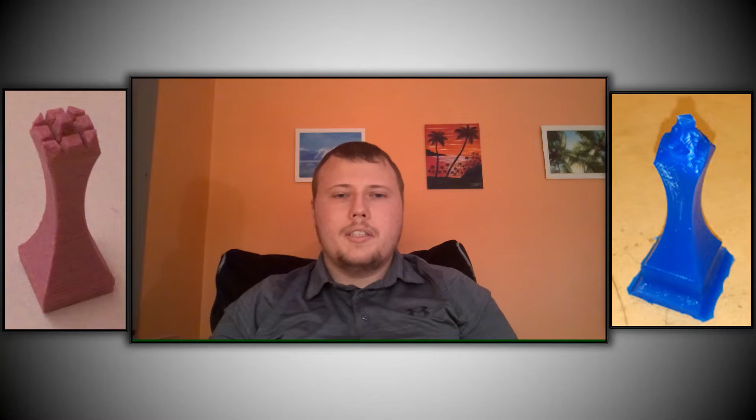Hey, last summer I had made a video about 3D printing a chess piece. Recently, last semester, I made another chess piece, but this time it was made through subtractive manufacturing. So, what does that mean? Subtractive manufacturing is more often than not, I believe, done through a CNC mill.

So a CNC mill is where you have a block of metal or plastic or wax or whatever. Then you have a computer numerically controlled CNC mill, so it can switch bits and drill holes and route out shapes and stuff. So you program it to sculpt a shape out of a block, kind of like an artist would make a sculpture out of marble or something, but a computer switches bits and does it all for you.

There's a special computer software that helps you do this and programs the machine for you in order to do this. So I did that this semester.

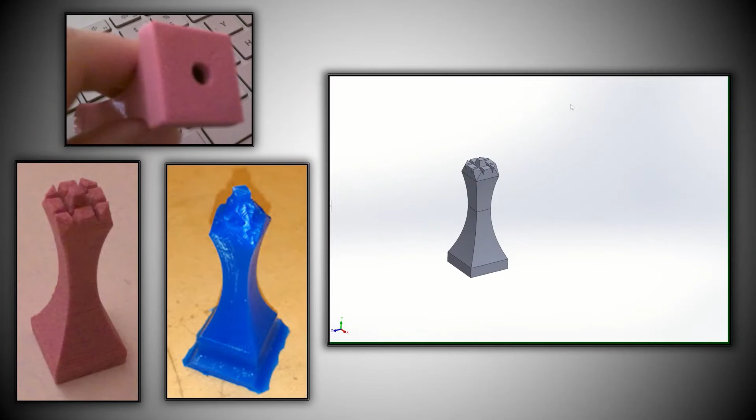Okay, so do you remember how I said that the queen was hollow? Because I 3D printed it, I had to make the walls 1/8 inch thick or smaller, but the width of the base is a lot wider than 1/8 of an inch, so I had to make the part hollow. So let me show you what the inside looks like.

Isn't that cool? So that's what the inside looks like. Here's the hole at the bottom, and because it's 3D printed, this is almost exactly what it looks like inside. Isn't that cool?

So in making the king that you'll see in blue, and note that because of the glare, you cannot see all of the details. It actually did come out a lot better than it looks. But in order to manufacture it, what we had to do was change the geometry. So what we wanted to do is take this queen here and reuse some of the geometry, but make it manufacturable from a CNC milling standpoint.

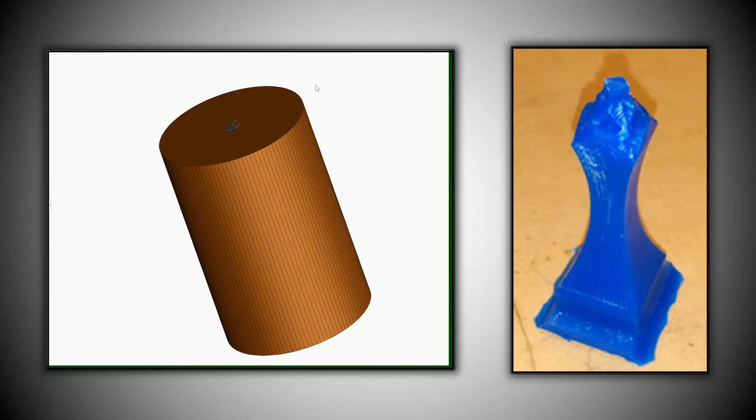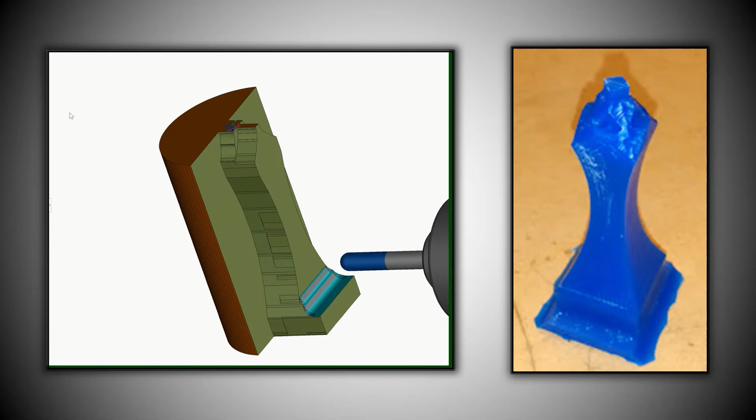So if you were wondering how the CNC mill sculpted the chess piece out of a cylinder block, I will show you. So here's a sped up version of how it was done. Trine actually has a CNC mill, and this is what we watched happen right in front of our eyes with our own G code, it's called. We created the G code in a program called Solidworks.

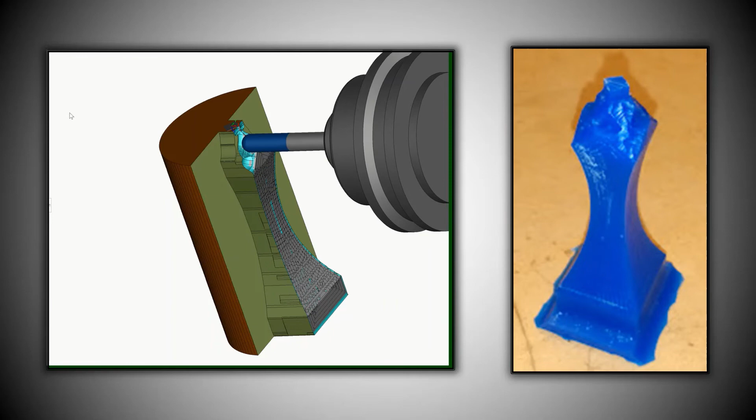In Solidworks, you can not only make the solid model, which I showed you in the last segment of this video, where I was showing you the queen and the king together. You can create those solid models, but another function of that software is Solidworks CAM, which creates G code, which is basically what you're seeing now.

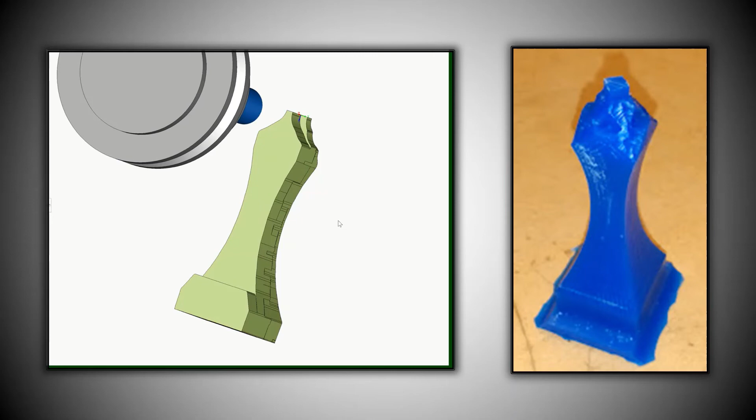And then you can put this G code into the CNC mill. The CNC mill will follow all the codes. That's why it's called computer numerically controlled. That's what G code is. And it'll follow all the steps and dimensions and numbers and stuff, and it'll create your part, as long as it's manufacturable, of course.

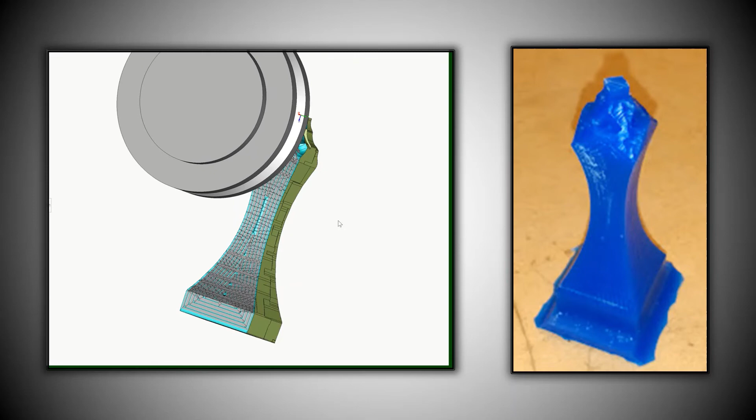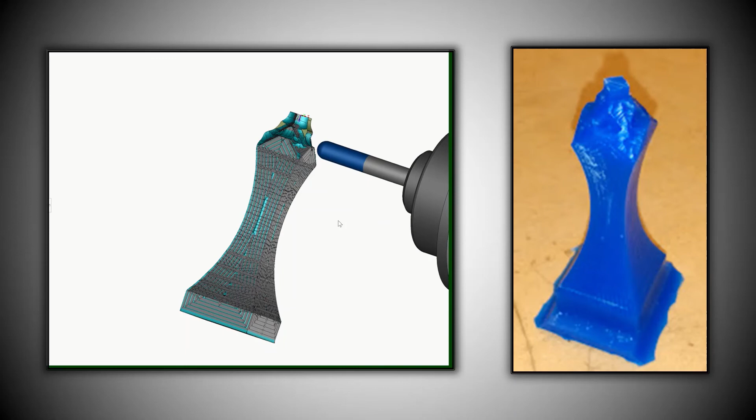But yeah, this was our final exam. It was about 25, 30 minutes long, and we watched the mill create our part. It was interesting because this is kind of different from what happens in the lab, because in the lab it's not only slower, but you'll hear all sorts of weird noises.

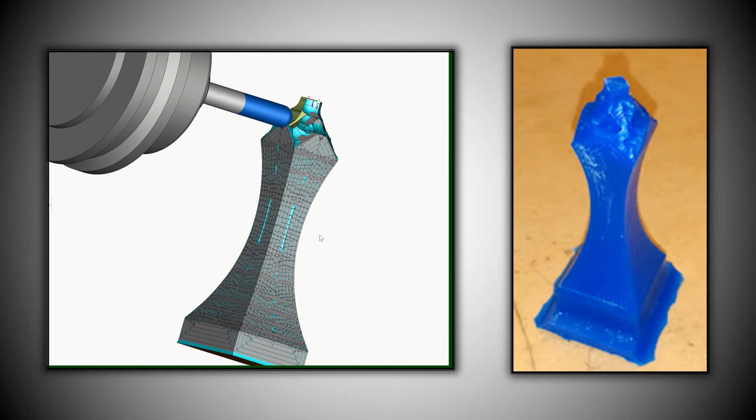It's called chatter, where there's this buzzing noise because your plastic or wax or metal part is vibrating from being routed on, drilled on. And so it's kind of loud, actually. It's very interesting, though, to just press a button and the machine does all the cutting for you. And now here it's finishing up the head really quickly. And so there you go. That's what it looks like.

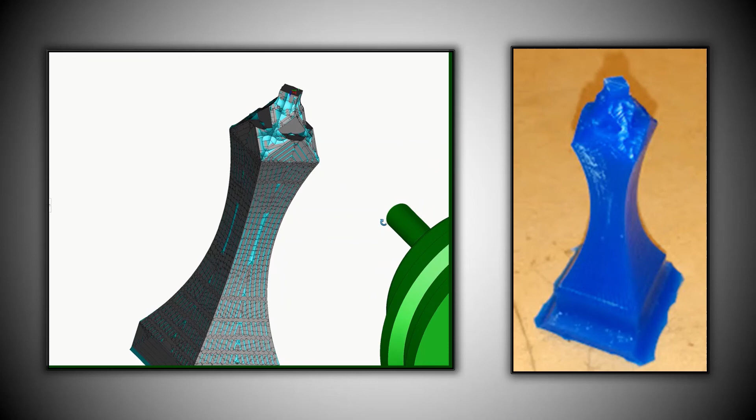Now, of course it's not perfect, but this is precisely what the actual part looked like that you saw in the glaring picture. The picture showed some glare around right here, and that was actually semi-accurate. But when you hold it in your hand, it's actually a lot smoother; this software exaggerates the excess material, emphasizing it because it's like, hey, I want to help you be perfect.

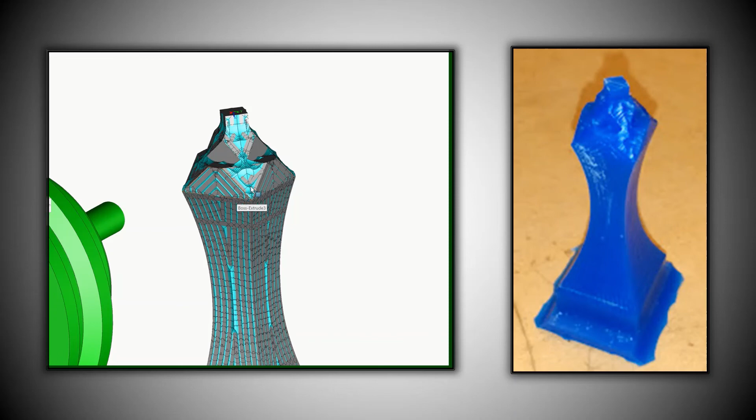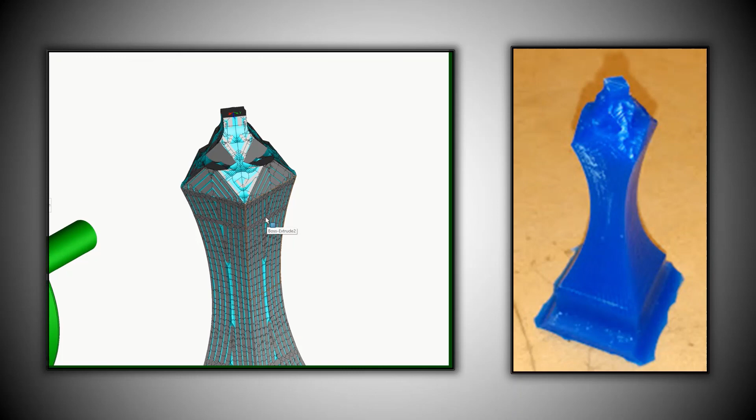Well, who knows if you actually can be, at least not without lots of hours of milling time. The milling machine will actually have an accuracy of, I think, something like 0.0001 inches. So that's 1/10 of a thou in machinist language. That would be 1/10,000th of an inch, I guess, is the accuracy, 0.0001. Sorry, a little engineering there.

But sadly, my partner took the part, so I couldn't take it home. It was his turn to take the part technically, so he took it. But it's still cool. I have pictures and I have the computer files and everything. And I have the 3D printed queen, which is not the same thing, but it's similar. So, yeah.

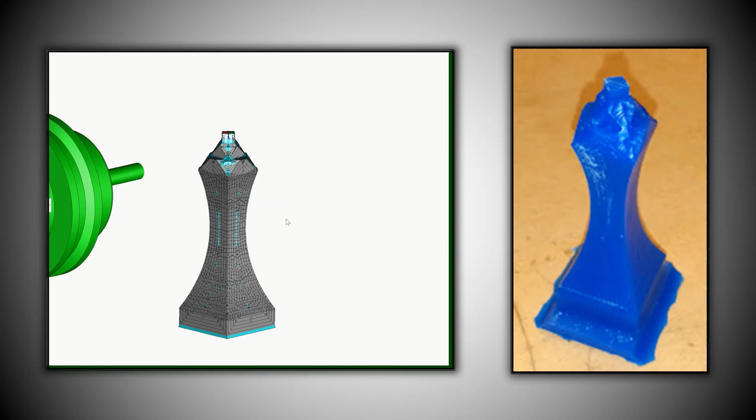Oh, I have come to suck your blood.